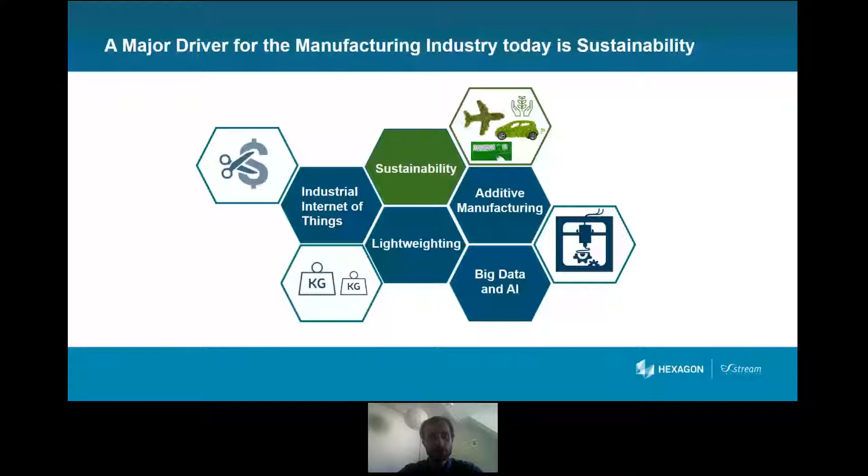So if we start our journey by the sustainability thinking, it's basically all about having a full life cycle view on the products that we manufacture. So it means having a deep understanding of what happens starting from the raw materials, the design stage, the manufacturing step, having the product in use, and then once the product reaches its end of life, what happens next? Do we re-enter a new cycle, or what are the externalities that we need to account for? And having this point of view from both an environmental point of view, but also a cost perspective, is critical to manage the business right today and to manufacture better products.

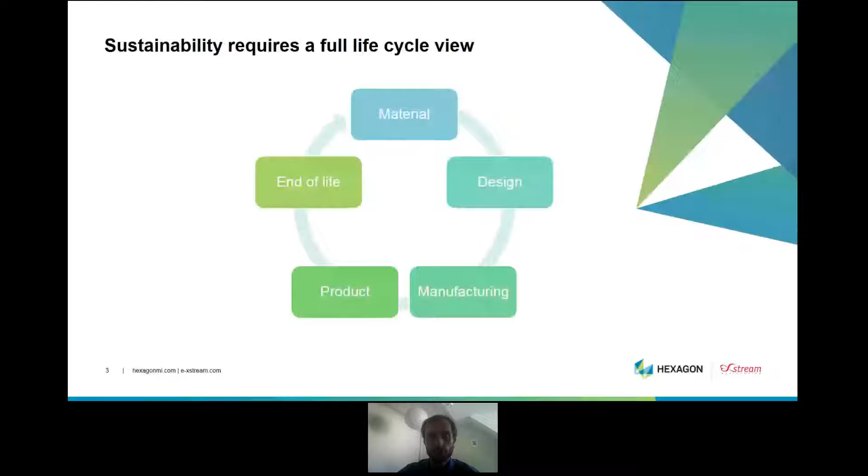So this being said, if we want to have a full life cycle view, how can we do this from an industrial perspective? Well, we believe that the digital twin approach is especially required. So the digital twin is, in a sense, a representation of the reality at different stages of the product life cycle, whether it's the R&D stage, prototyping, production, manufacturing, the product which has been delivered, which is maintained and then retired.

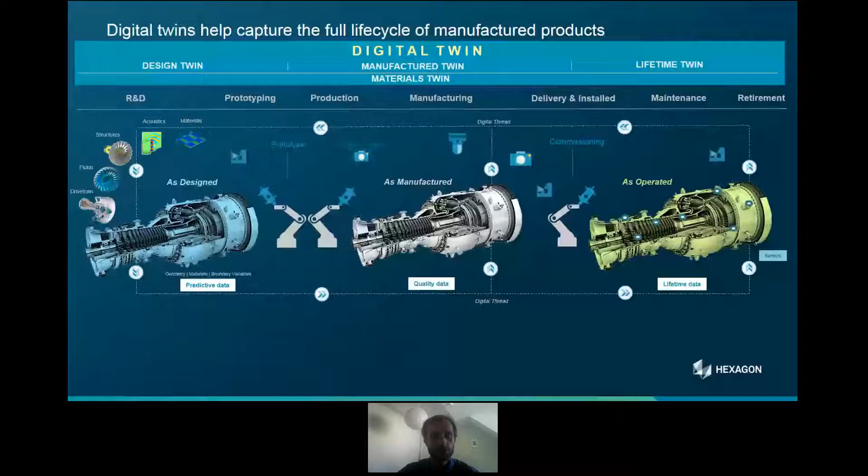All across these steps, what we want to do is have a digital description of the product and make smart decisions, smart measurements based on the gathered information. So obviously today we will talk a lot about the early stages once we are in design. So that means basically R&D here on this screen.

But the big point to have in mind is that all the decisions that we will be discussing in the webinar today have a strong impact on the rest of the life cycle. So it's believed that 80% of the impact is mostly locked in the R&D stage. So it's essential to start right from the very beginning.

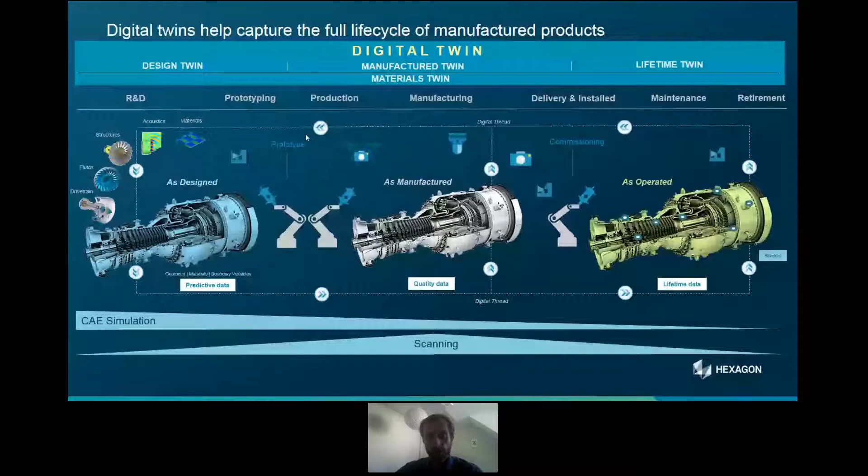And within the world of digital twins, we'll have a look today at what we call material digital twins. And these are descriptions of the materials based on their microstructure and providing a link to the manufacturing process. And this is supported by what is called ICME. So ICME, it stands for Integrated Computational Materials Engineering.

If we have a look from a historical point of view, well, the material engineering context, it has been a lot about understanding the link between the material microstructure and the material properties. This is what has been done in universities since a while. But if we look at the meaning of integrated computational materials engineering, what it means is that first, to understand the link between the microstructure and the material properties, we use simulation techniques, which are now affordable with the rise in computational power.

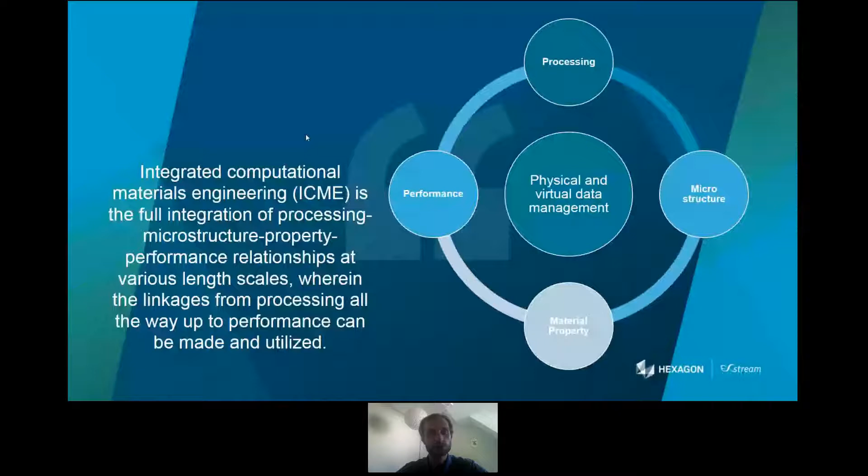And integrated means that it goes all along the scales of the material, basically from atoms to the full structure. So in other words, it's the full integration of processing, microstructure, property, and performance relationships. And this ICME approach leads, we will see later on, to also an important aspect, which is the management of both physical and virtual data, and trying to leverage those two assets.

So ICME, we tend to see it a lot from the technical perspective, meaning that we are defining an engineering workflow where the result of the manufacturing has an influence on the material, which has an influence on the part performance, which has an influence on the product business success. And from a simulation point of view, it's now very well addressed how to link the various simulation softwares which are required to perform this.

But I'd like also to emphasize that ICME is also some kind of organizational paradigm shift, because it means that you need to change the way you perform engineering. In the past, it has been a lot segmented into silos, where a designer throws a CAD with some given idea of what the material is, then we refine the choice of the actual material for the product. You throw that to a structural analyst, who finds some little tweaks to optimize the performance, and then you push it hard to the manufacturing guys who need to find a way to actually produce the part as it is.

And so that's before. Now what we want to propose with ICME is to have an interconnected workflow where everybody influences each other. So it's a much more interesting engineering workflow that allows us to find a better overall solution. And that means that within engineering departments, we need to break the silos to have the designers talk directly with the material scientists, the manufacturing guys, and the structural analysts typically.

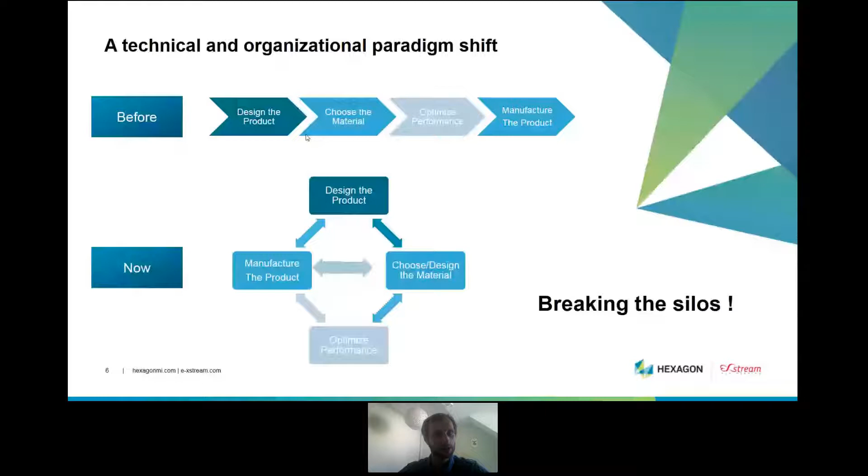So what does an ICME workflow look like from a technical perspective? Well, ICME will usually involve different scales. So it means having a representation, whether from test data or from physics-based simulations, of what is happening at the molecular level, then at the mesoscale level, at the coupon level, at the component, and then up to the final assembly. So that means that when performing an ICME workflow, one has to handle a significant amount of data, which can either be simulation data or real-life data.

And what I'd like to emphasize also on this multi-scale approach in terms of benefits is that there are really two big ways of applying ICME. One which is bottom-up and the other one which is top-down. So by going bottom-up, it's basically a cause-effect analysis. So by changing something at the lower scale, by applying ICME, you understand the consequences on the upper scales until the final product. And on the other hand, if you go top-down, you can achieve a goal-oriented design method.

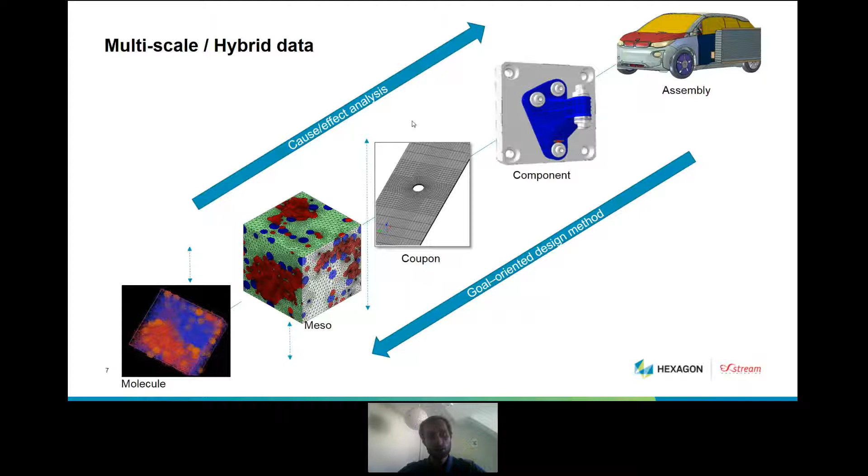So let's say you fix the desired performance by going down the scales and applying the constraints that you have for your design. You will end up finding what is the right material, what is the right microstructure, what is the right processing method to achieve the desired performance. And so that's how ICME is enabling this close connection between all the stakeholders that we were mentioning just before.

Now, today we want to talk especially about composites. In the previous slides, this was pretty much generic, so it would apply not only to composites, but to plastics, to metals, to foams, and you name it. Now, for composites, the typical steps would be to consider first what happens at the molecular level with molecular dynamics. So questions that we would answer at this scale would be, how does the chemistry improve my resin properties, for instance? That would be addressed to the chemist guys or material developers.

Then going one scale above, we would be in the virtual compounding. We would look at questions such as what material microstructure should provide the desired properties, or if I need to increase my material strength by 10%, what should I change in the way I actually compound my material?

Then once the material actually exists, whether physically or virtually, we need to understand precisely how it's handled during the manufacturing and have a look at what processing conditions enable high quality components. So high quality means obviously the final part shape. It means also the final material properties that we get once the part has been manufactured.

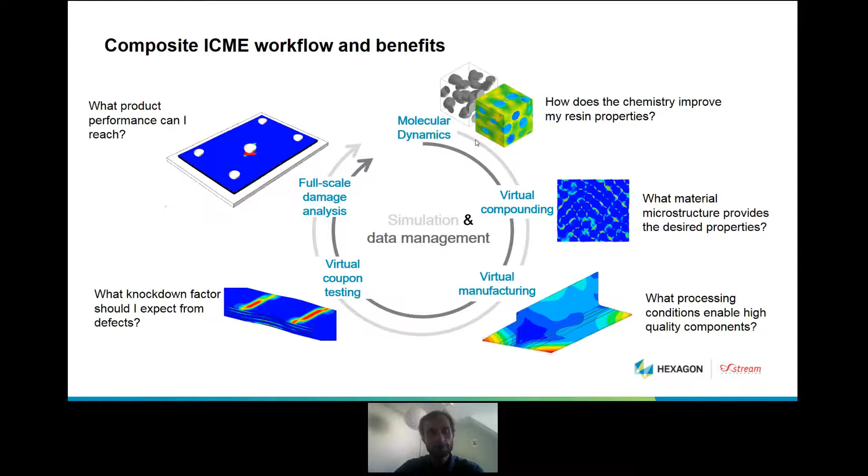And what happens when we go for an ICME approach is that we will start playing around with both this physical and virtual materials data along the composite value chain. And by having both these data, we can feel that there is an opportunity to blend those data together and to build more from what is available. And that's what I would like to show you in the next few slides as a starting point.

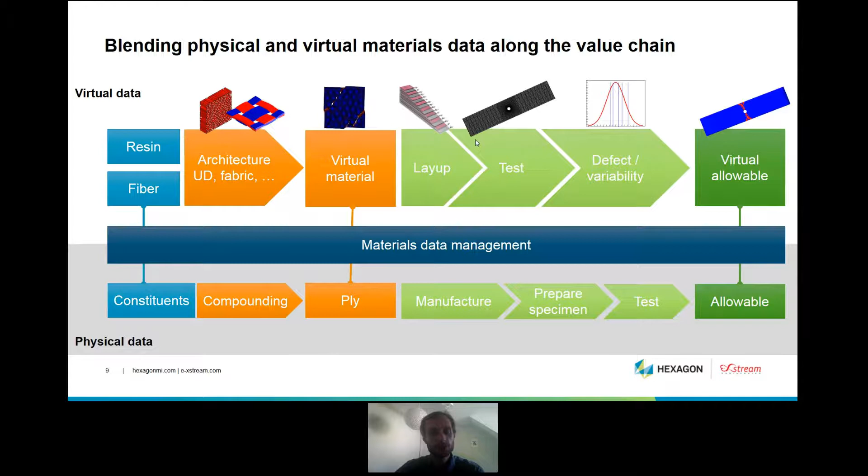So first, let's have a quick look at what material simulation can achieve for composites. So here is an example where we simulate the response of unidirectional composites with an epoxy combined with carbon fibers. From a simulation workflow perspective, it means describing the behavior of the polymer matrix, of the carbon fibers, the characteristics of the interface, and then defining the composite architecture. So what is the fiber content, for instance, what is the fiber orientation for this application.

And once this information is defined, what you can expect as outcome is basically any kind of mechanical testing on the material. And that means we can go beyond the classical physical testing, which is usually uniaxial, hardly biaxial, because it's very complicated. But here with simulation, it's the same cost to do a biaxial testing or a uniaxial testing.

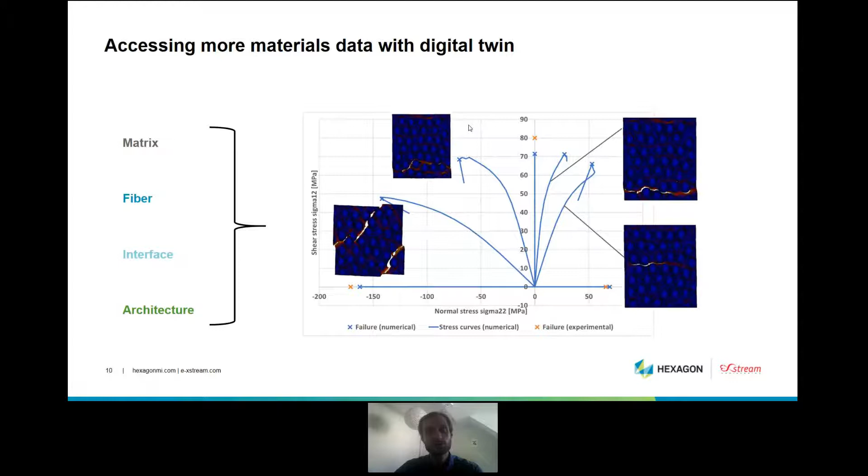If we go one scale above at the composite coupon level, we start talking about virtual allowables, so replicating the full allowable generation process but through simulation. To do this, we need a few technical ingredients that I'll show you on the slides. At e-Xstream, we've been working a lot on this topic over the last few years.

We've also partnered with the University of Porto to develop the best failure models. What this means from a result perspective is that for classical aerospace composite grades and different kinds of layups, we are now able to predict the strengths, whether for unnotched or open hole coupons in tension and compression, with an accuracy of plus or minus 10%.

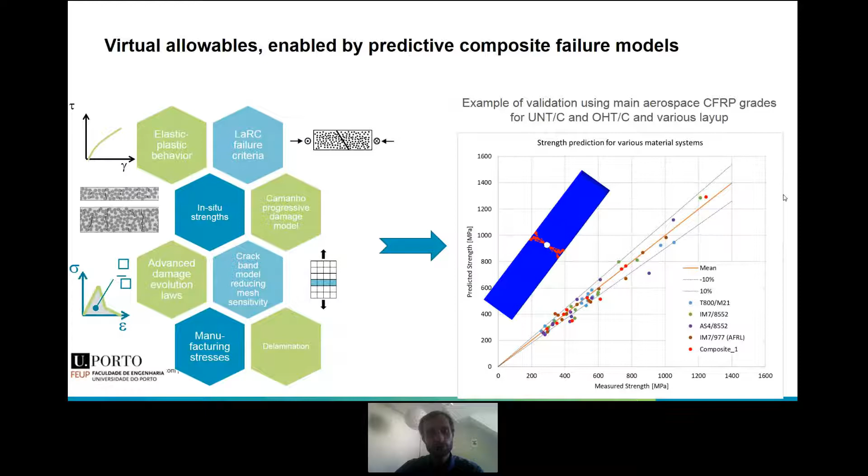And we believe that this is really a requirement to push that virtual data further. So let's have a look now at two use cases: one, how ICME for composites can be applied to reduce the cost of materials data, and another case around novel manufacturing techniques, like automatic fiber placement.

So first, let's start with reducing the cost of material testing. This is obviously a very important concern for anyone who needs to manufacture composite parts. For the design stage, we need to know what material properties we should use to design the part, and accessing those material properties usually requires testing. For composites, especially due to the high number of variables you can have, that testing phase can become very expensive, whether from a time or cost perspective.

The good news is that there are ways now to accelerate the development cycle with the digitalization of material testing. There are three big concepts that have become mature enough now, and they are the ones we saw in the beginning. First, virtual material development: understanding how the combination of different constituents can generate the desired material properties.

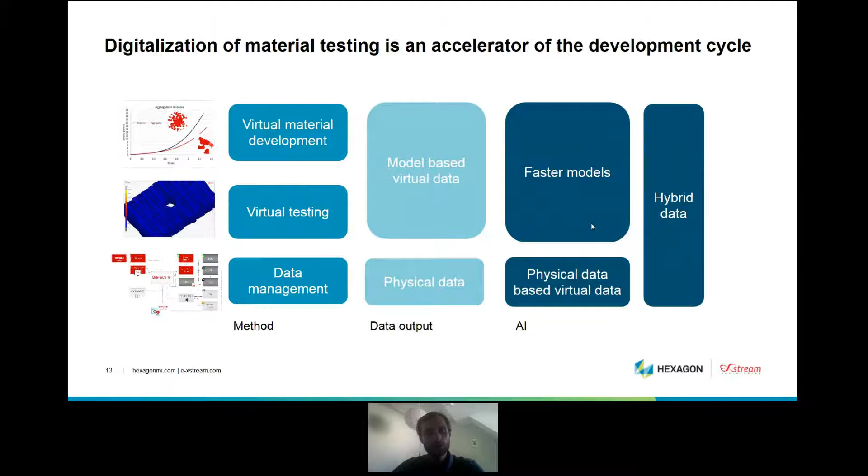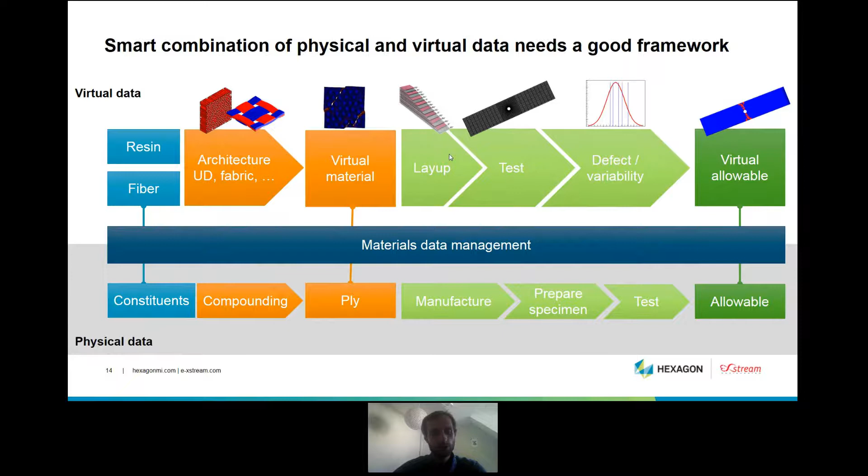So if we want to make this vision a reality, to combine physical and virtual data, we need a good framework. That means having a materials data management system inside your company which is able to capture both the physical and virtual data at different scales: information about the constituents, information about the architecture of your material, information at the ply level, information about how panels and specimens have been manufactured, and then having the right connectors between each and every scale, whether from a simulation perspective or simply from a data management perspective.

So let's have a look at two scenarios that apply this framework, and let's see how we can create value from the large amount of both physical and virtual data available in the company.

To do so, what we want to do is first collect all the available information. If you already have a material data management system, the homework is done, everything is there. From there, we train a model with something like 100,000 data points, which for the record is worth approximately millions of euros. By having this model, we'll be able to find information about new composite combinations, layups, and testing conditions that have not yet been tested.

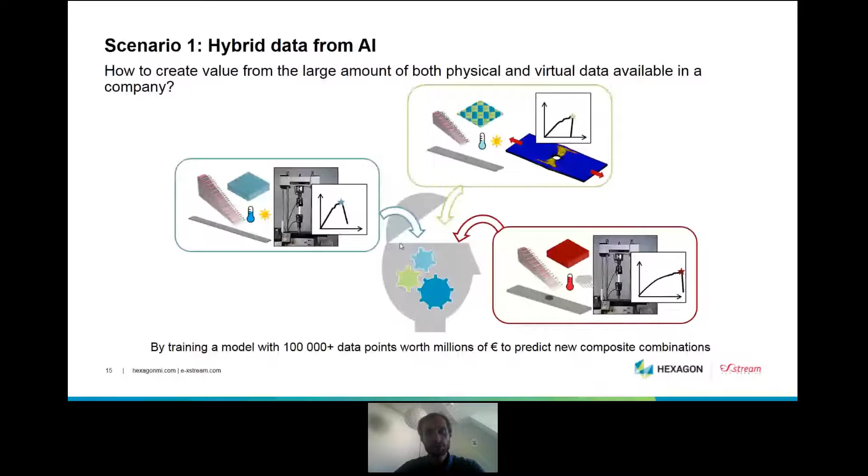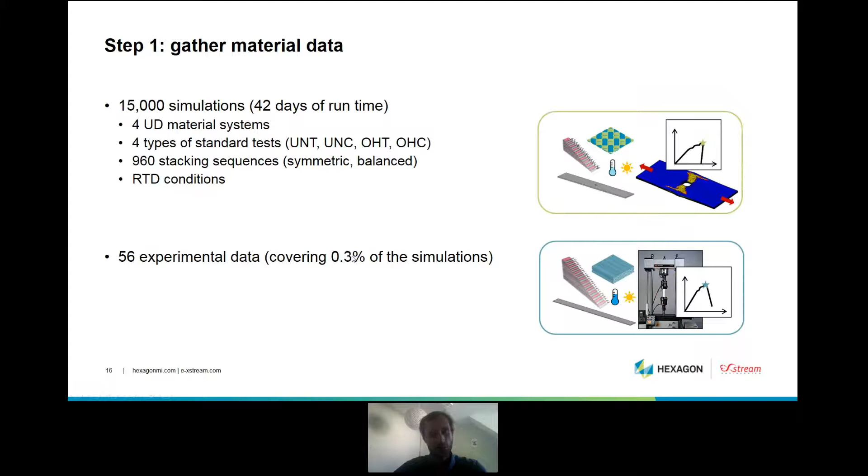So step one, as mentioned, is to gather the material data. In the following exercise, we performed something like 15,000 simulations, approximately 42 days of runtime. We looked at 4 different UD material systems, 4 types of coupon tests—unnotched and open hole tension compression—960 different stacking sequences, which were symmetric and balanced, and we kept to room temperature dry conditions. On top of this, we added 56 experimental data points from the literature, only 0.3% of the simulation points. With this, we started training the AI model.

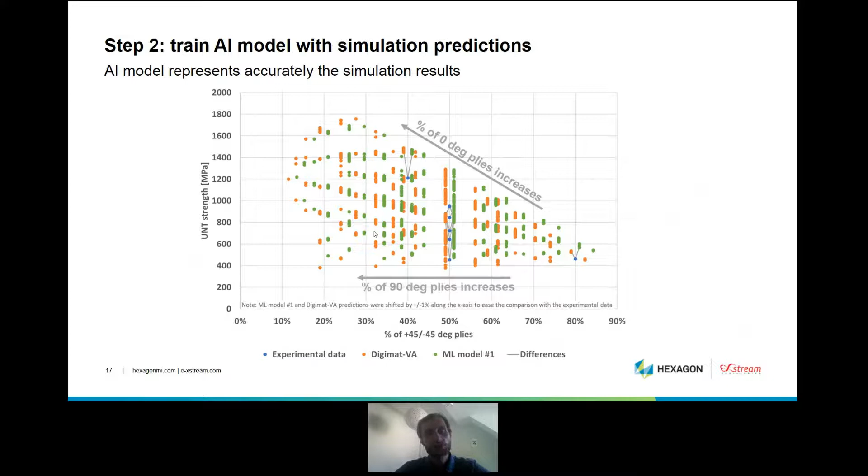First, we train an AI model with solely the simulation predictions. What you see on this graph is only the case of unnotched tension strength for the different stacking sequences. The orange points are simulation results, and the green points are what the trained AI model is able to predict. So an AI model is able to replicate pretty well what you get from the simulation. But at this stage, what we haven't done yet is include the value of the experimental data—that's the next step.

Now that we have an AI model trained on simulation data, we will train it additionally with physical data. What happens here is that the AI model's fidelity improves when we train with physical data, because we're able to capture what is happening exactly in the real world. In this case, we took a tricky combination for the simulation models, the ply bunching effect, which was not present in the simulation model used. Once we include the experimental data in training the AI model—shown here in purple—it becomes much closer to the experimental data.

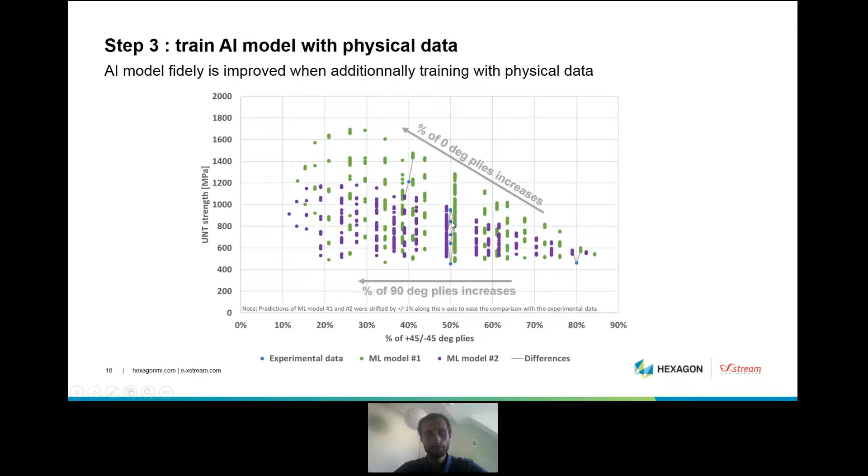So overall, once we apply artificial intelligence to virtual and physical data, what do we see? From an experimental perspective, we have a strong influence of the ply bunching effect. The initial simulation data points do not capture the effect of bunching because they were not yet using the ingredients I showed you before. Once we start training the machine learning model with both simulation and experimental results, we get better average values, but we're still not able to perfectly capture the effect of bunching because the first machine learning model did not actually capture this effect.

So long story short, what do we need? We need to have a simulation model which has as much physics as possible. Good news is that now it's actually possible with the latest releases of the virtual testing software from our ICME platform. And we need to include more experimental values to train a machine learning model.

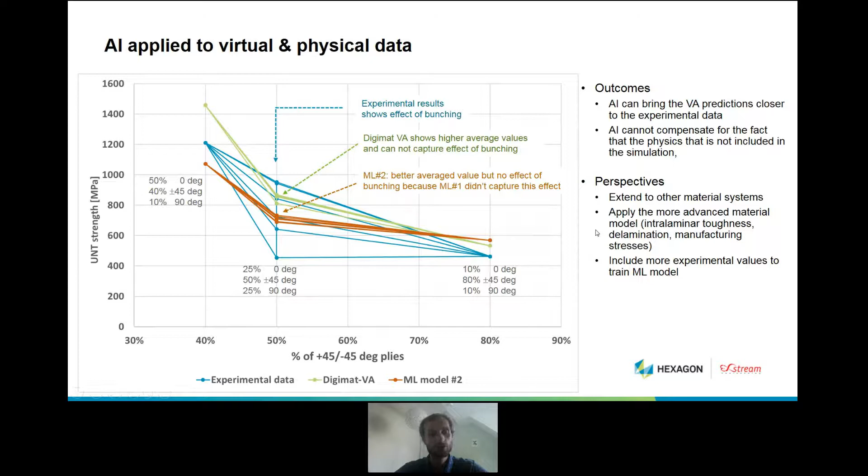The second scenario on the combination of physical and virtual data is how we can use virtual data to complement and optimize physical data needs. Here we will not be looking at artificial intelligence anymore, but simply at simulation as a decision helper for better testing in the real world.

So if we compare a 100% physical approach with a hybrid approach, if we want to develop a carpet plot, from a physical perspective we need to combine all layups, times all types of tests, times all repetitions needed to capture the variability. This is required to meet the desired material data.

With a hybrid approach where we start with simulation, you perform first a simulation based on a very limited set of physical data, like laminate information. This gives an indication of the best candidates from the virtual data results. From those good candidates, it becomes possible to perform physical testing only for those ones. The time and effort needed for testing becomes really reduced, because instead of testing all possibilities, you test only the right candidates suggested by simulation. The gap between both is the time and money which is saved.

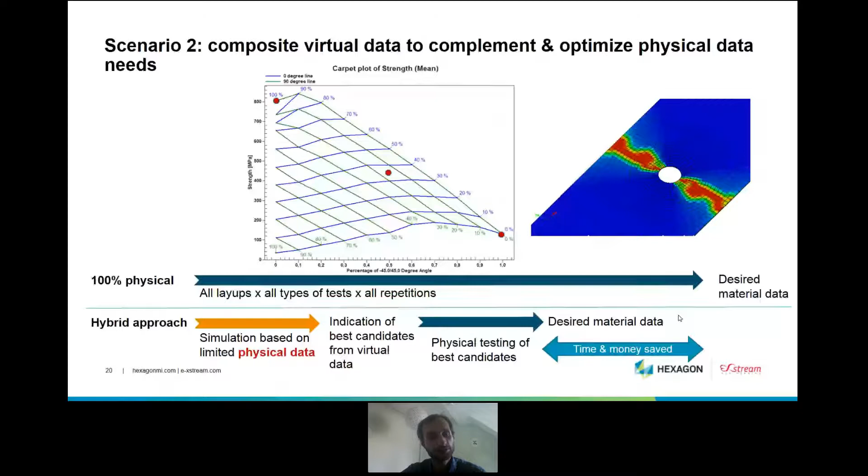This ends the first part of the webinar, where we looked at how ICME can lower the cost of materials data, whether with artificial intelligence or with design decisions guided by simulation insights.

Now I'd like to go a bit more into the actual manufacturing stage in the engineering workflow, and talk about novel manufacturing techniques where ICME can also have a significant role. Today we'll have a look especially at automatic fiber placement.

Automatic fiber placement, also called AFP, has been an answer to one of the main aerospace challenges, which is to integrate more composite materials in aircraft. One of the drivers is, of course, the production rate. It's estimated that with automated manufacturing processes such as AFP, we can be something like 20 times faster than hand layup.

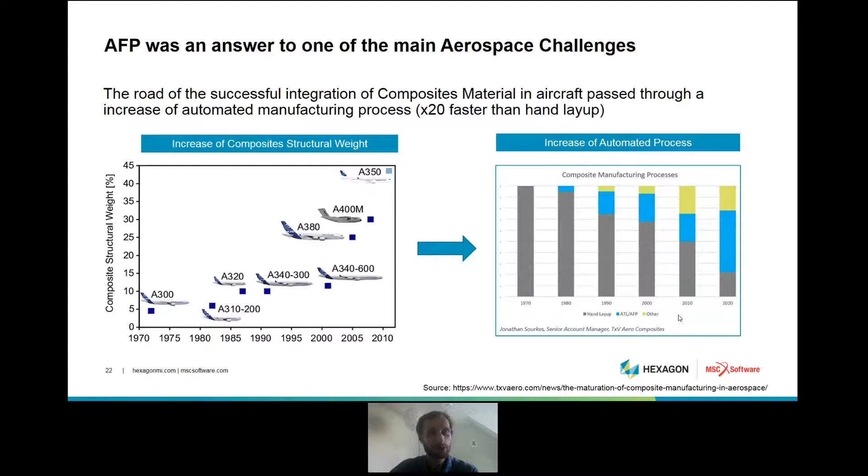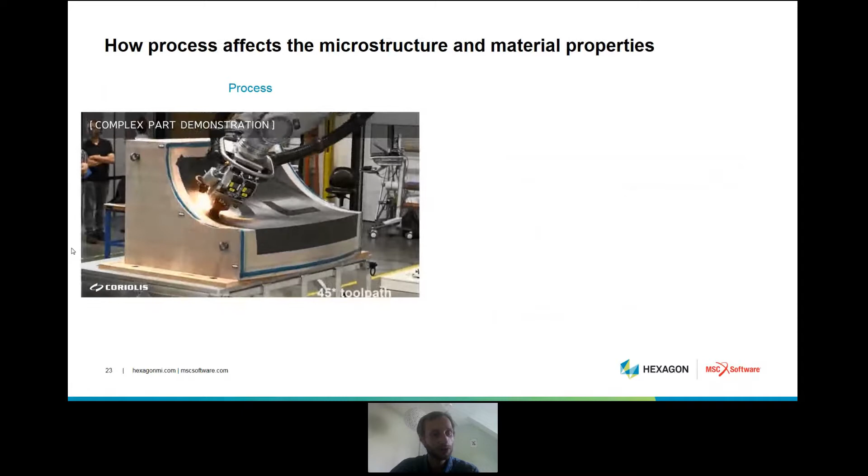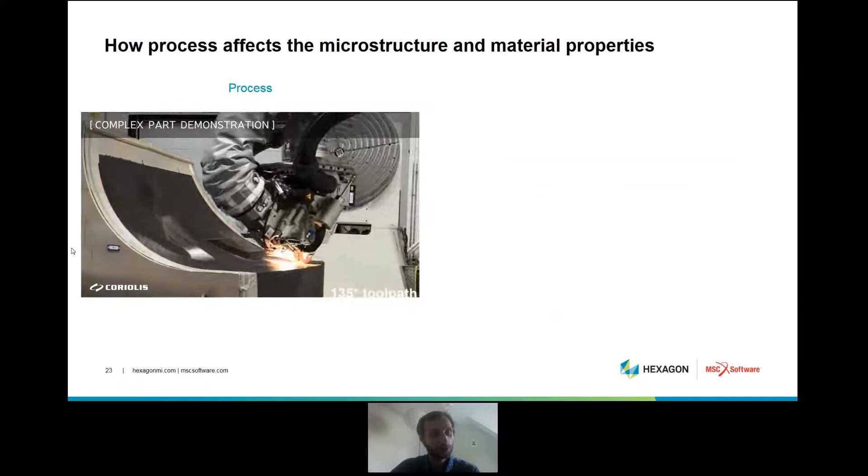So how does automatic fiber placement work? This is an automated manufacturing technique which goes hand in hand with the digitalization topic. What we have is tows of material, usually fibers that are pre-impregnated and are deposited following a discretization of the part geometry that we want to reach.

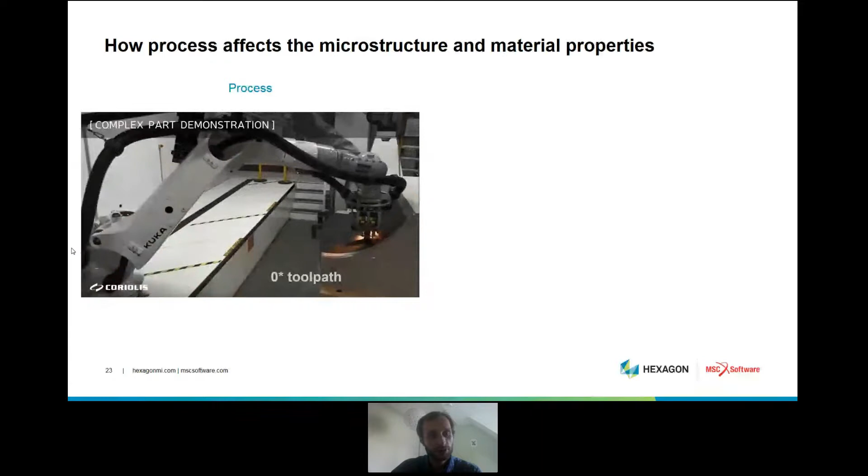As part of this discretization, we cannot perfectly cover the desired geometry. To do this we would need very narrow material strips, which is not possible from a physical perspective. So as engineers, we need to live with the defects introduced by the process.

Hopefully there are defects that we can predict quite easily, because it's already information that we can extract from the manufacturing software that allows us to prepare this kind of process. We'll be looking in the next slides at understanding better these defects, mainly gaps, for today.

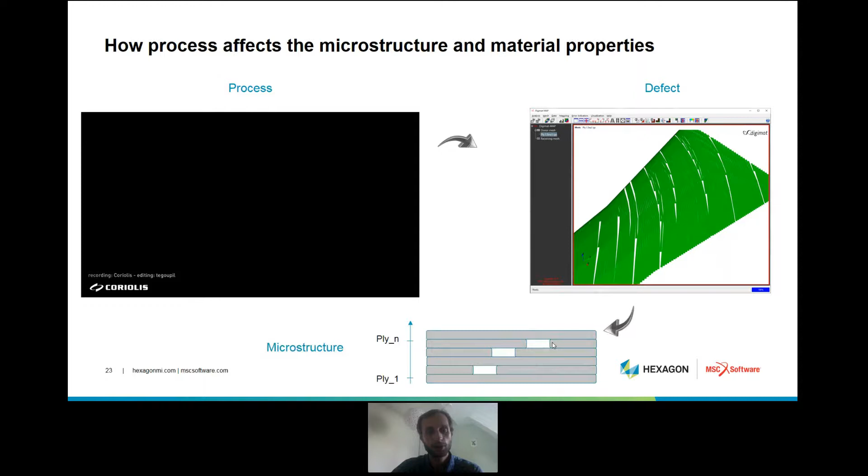As you can see in this cross section, when parts of composite material are not present due to defects, this introduces either a local reduction of thickness or a reduction of the fiber volume fraction. This directly affects the local material properties and has an impact on the actual real part performance.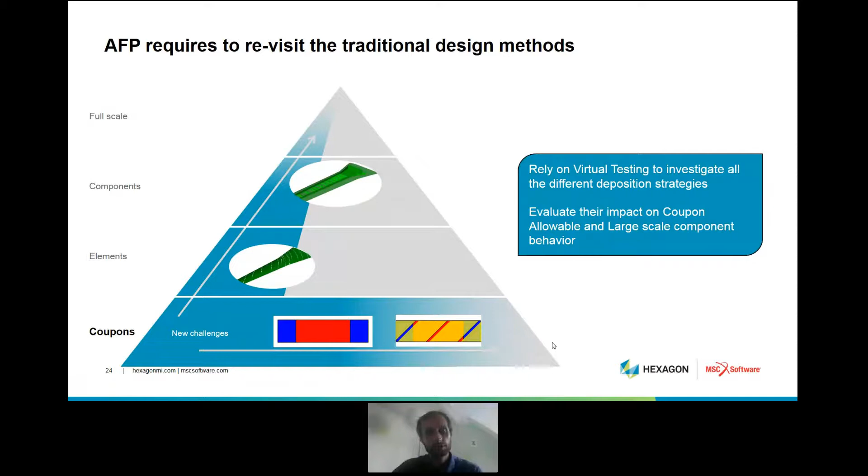This means that once we start introducing automatic fiber placement in engineering workflows, we need to revisit the traditional design methods, because with these automated manufacturing techniques we have defects that need to be characterized. Since those defects can be quite well controlled, we need to understand the right trade-offs in terms of how wide a gap can be, and how it should be positioned compared to a hole in a part. This means new approaches are needed across the scales, starting from the coupon level to the elements and then to the final components, all impacted by the defects and gaps.

First you define the defect characteristics and the location - things like the gap between courses, the transverse shifts, the location versus the hole, and so on. Once this is defined, it's all about simulating correctly the local material properties due to the modification of the local microstructure.

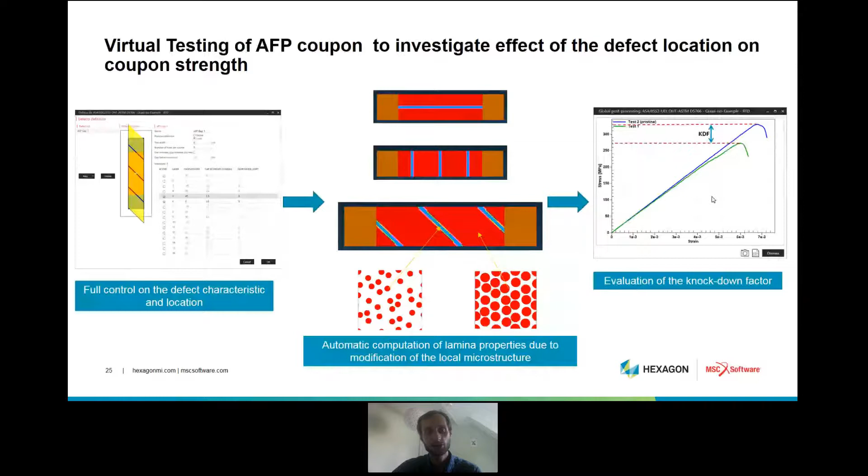So in this example, in the gaps zone, what we have is a lower amount of fibers. That means that the material will be less stiff and will also be less strong in those areas of the ply. And the question is, once I perform a tensile test on this coupon, what is the knockdown factor that I get? And with the simulation approach, you can compare what happens from a pristine point of view, so without any gaps, and when you have the defined gaps, what is the final strength? And this knockdown factor can then be evaluated for all possible defect variations and can enrich the final decisions on how to manufacture the part.

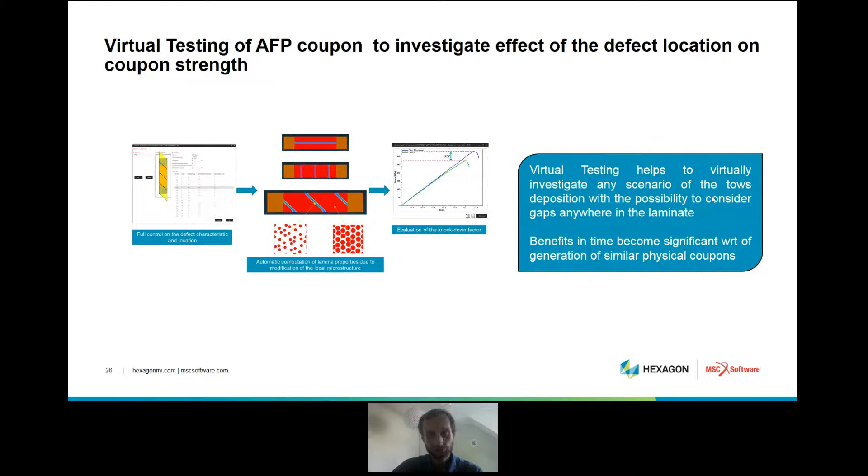Okay, so in summary, this virtual testing approach helps to virtually investigate any scenario of the tows deposition with the possibility to consider gaps anywhere in the laminate. So there is strictly no restriction there. And if you want to do this purely in a physical way, as you can imagine, it can become a significant effort because you need to test all possible combinations.

So now moving on to the full parts, what we'll witness are the same challenges. So from the manufacturing process point of view, we will know where the fiber and the gap locations are, which is a very important aspect because it will drive the local material properties. But also on top of this, we need to know precisely what the local fiber orientation is, which can vary because it's following the actual part's geometry.

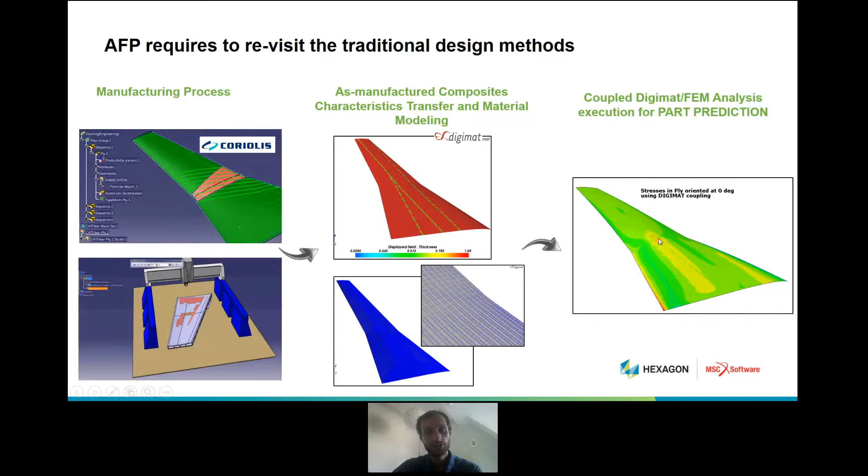And so to have an accurate prediction of the part's performance, we need to have this intermediate step where we look at the as-manufactured composite characteristics. And to have this information, it's all about transferring those manufacturing data and having a multi-scale material modeling approach so that in the end we can predict the level of stress that we have locally as a function of the real microstructure.

In summary, at the component level, like the wing that we have here, the connection with the manufacturing process is really crucial because it enables, on one hand, to transfer the exact location and shape of the gaps, and on the other hand, the as-manufactured fiber orientations, which can change versus an idealization of the part. And with ICME, we have an integrated method to address those two challenges and truly connect the process with performance through the material model, which is sensitive to the microstructure.

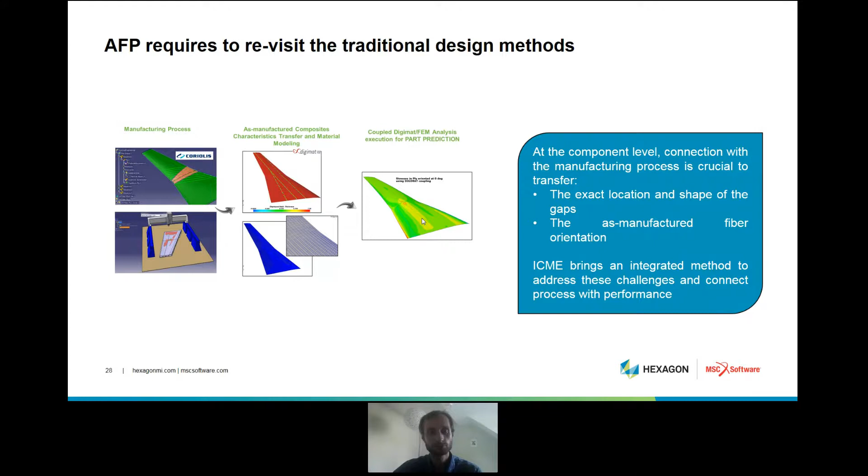And where is this leading to? Well, up to now, we have mentioned only the designed manufacturing, in the sense that it's the programming of the machine that we are using to feed the defect information. But obviously, when it comes to manufacturing, there is perhaps a difference between what you ask the machine to do and what the machine has actually done, because there can be variations between what you plan and what actually happens. And so this approach, where we connect the manufacturing with the material microstructure and the part performance, leads naturally towards a digital twin of a full AFP structure, by adding on top of the digital world also real-world information.

So in the real world of manufacturing, with deposition techniques, we can capture with scanning real-time information about the ply orientations, about the defect locations. And this enables, therefore, to connect that information to a digital twin of the AFP structure and evaluate on time the impact of any defect that has been introduced, or any difference that has been introduced between the machine programming and the real-world data.

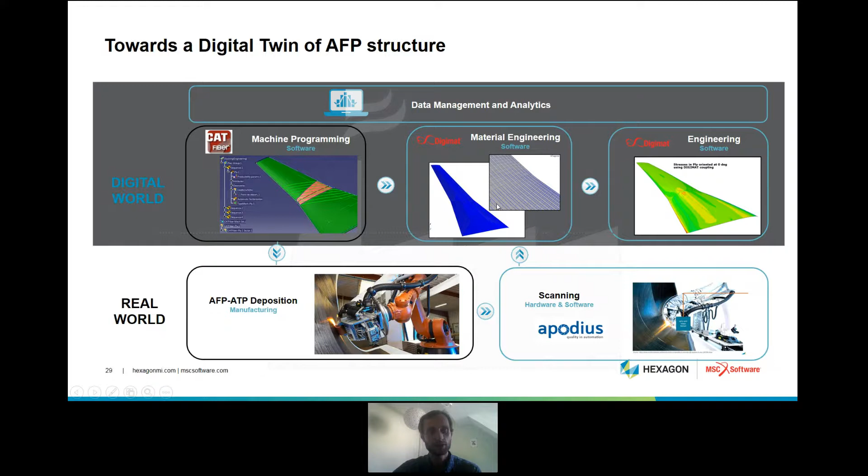So this being said, key takeaways for today: why ICME for composites? So first, support the need for more composite material data at an affordable cost, connect all stakeholders with a material digital twin for improved collaboration, manage complexity of composite material design variables, accelerate the adoption of new manufacturing technologies like fiber placement or additive manufacturing, reduce the risk by anticipating manufacturing issues and effect of defects, and finally, improve production rate thanks to better control of the manufacturing process.